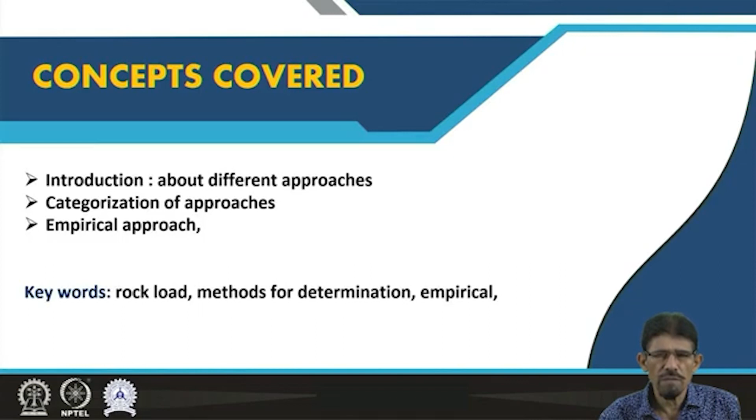In previous lectures we have elaborated about formation of damage zone during the excavation of an opening in ground, and factors relevant in estimation of rock load or ground pressure. In this lecture we will discuss approaches for estimation of rock load and ground pressure, focusing on the empirical approach in detail, along with other methods in brief. We will cover different approaches utilized for estimation of rock load, categorization of approaches, and one of the approaches - the empirical approach.

As we have already discussed, during the excavation of an opening there is redistribution of stresses, and this redistribution tries to regain the original position. During this process, the strata try to adjust with the redistribution of stresses. If the redistribution exceeds the capability and strength of rock strata, there is development of a damage zone around the excavated opening. The weight of this potentially unstable, detached, or deformed zone formed due to creation of the underground opening is recognized as rock load. In definition, rock load may result from the dead weight of some potentially unstable layer or blocks of rock, detached zone, or deformed zone, as well as from the so-called ground pressure.

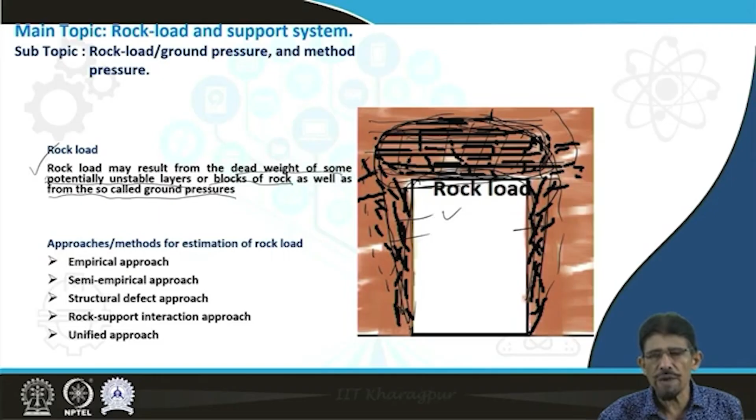The rock load can be estimated involving a number of parameters which we have already discussed in detail. Regarding approaches for estimation of rock load, we have the empirical approach, semi-empirical approach, structural defect approach, rock support interaction approach, and unified or integrated approach combining all of these. In this lecture we will elaborate on the empirical approach.

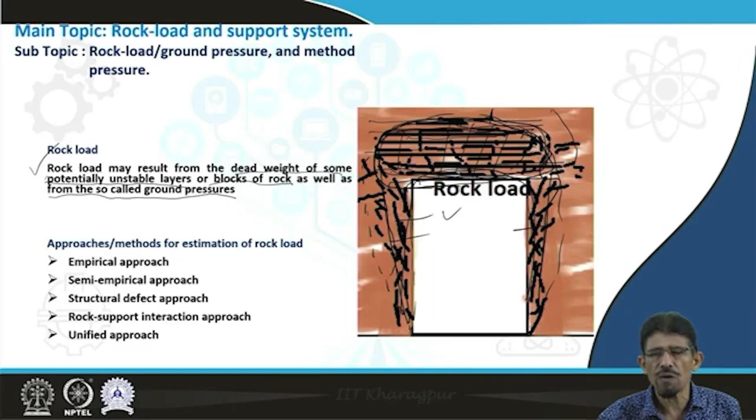As we discussed regarding determination of strength in rocks, we have experimental facilities capable of showing results concerned to strength and mechanical response of rock in case of general intact rock material. However, in case of rock strata - which is an integration making up the rock mass, consisting of rocks and discontinuities or joints - it is very difficult to test in experimental mode. Therefore, we prefer to consider the empirical approach to determine rock load.

Rock classification was proposed since very early times, and many classifications have been proposed, differing in different countries. Several researchers have proposed rock classifications, but classification of rock in geology is qualitative in nature, only providing descriptions of rock. Nevertheless, the classification proposed by Terzaghi in 1946 is the most fundamental one among all proposed rock classifications, because this is the first approach to partially quantify rock for engineering application.

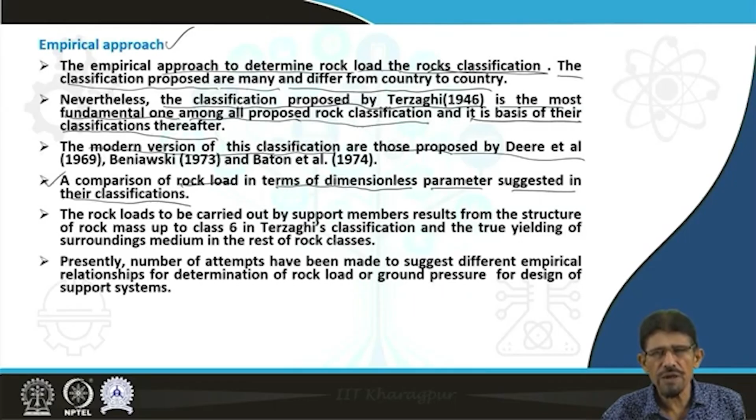It is the basis for classifications by later researchers, and modern versions of this classification include those proposed by Deere et al. in 1970, 1969, Bieniawski in 1973, Barton et al. in 1974, Hoek and Brown in 1992, and many others. A comparison of rock load in terms of dimensionless parameters is suggested in the classifications of Terzaghi, as well as those proposed by Barton et al., Deere et al., Bieniawski, etc. The rock load to be carried by the support member, resulting from the structure of rock mass, applies up to class 6 in Terzaghi's classification, with true yielding of the surrounding medium occurring in the rest of the rock classes.

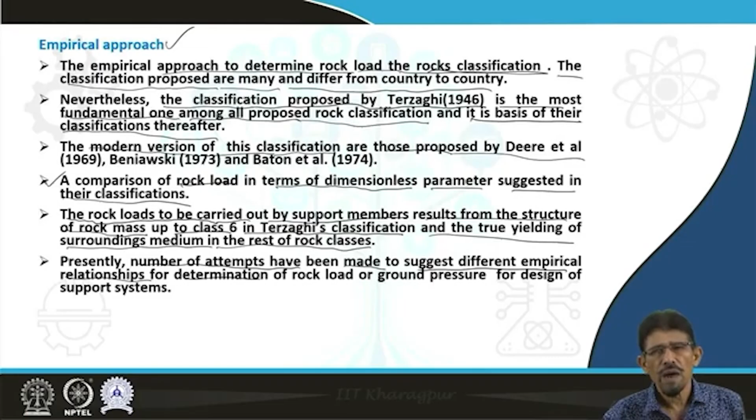Presently, a number of attempts have been made to suggest different empirical relationships for determination of rock load or ground pressure for design of support systems. Basically, the empirical approach is based on rock classification. Nowadays we are replacing the term rock classification with rock mass classification. We have a number of rock mass classifications for our geotechnical issues and applications. One of the first attempts in this direction was made by Terzaghi in 1946, although he started working on it in 1943.

Terzaghi considered structural joints of rock masses and classified rock into 9 categories: hard and intact rock, hard stratified schistose rock, massive moderately jointed rock, moderately blocky and seamy, very blocky and seamy, completely crushed but chemically intact, squeezing rock at moderate depth, squeezing rock at great depth, and swelling rock.

This classification was actually qualitative in nature but utilized for engineering approach. This concept was applied for a 5.5 meter wide steel-supported railroad tunnel excavated in the Alps during the late 1920s for providing railroad access. It was probably the first attempt of its kind.

Earlier, geologists had attempted to categorize rocks in a very descriptive manner that could not satisfy engineering use except for description of rocks. As per Terzaghi classification, if there is no joint, then the rock is recognized as hard and intact.

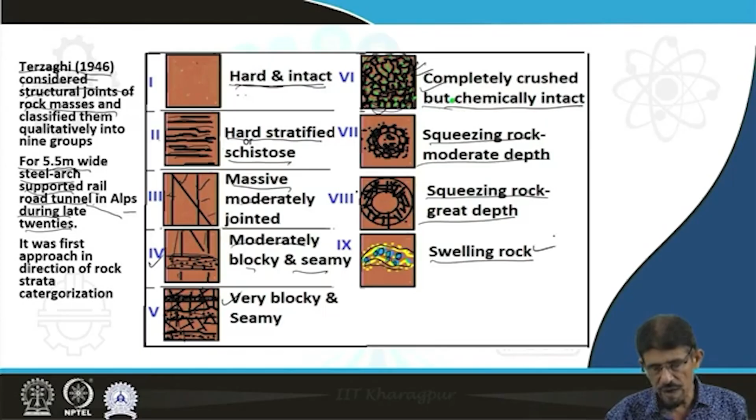As far as squeezing is concerned, squeezing is a very typical type of phenomena. Let me explain. When we create any opening in rock strata, if this opening is located in squeezing ground condition, then as per rule, due to creation of this opening, there is a redistribution of in-situ stresses, resulting in formation of a damage zone around the opening.

This formation of damage zone around an opening is generally defined by some stand-up time - few hours, few weeks, few months, few seconds or zero seconds - depending on the nature of the ground. If the stand-up time is suitable, say 5 hours, and we are not getting extension in formation of damage zone, then we are able to provide lining and support for this type of opening.

But in case of squeezing, there is a continuous increment in formation of damage zone with respect to time. The formation of damage zone becomes dynamic in place of static. Therefore, it is very difficult to estimate rock load or ground pressure to provide a support system of defined capacity.

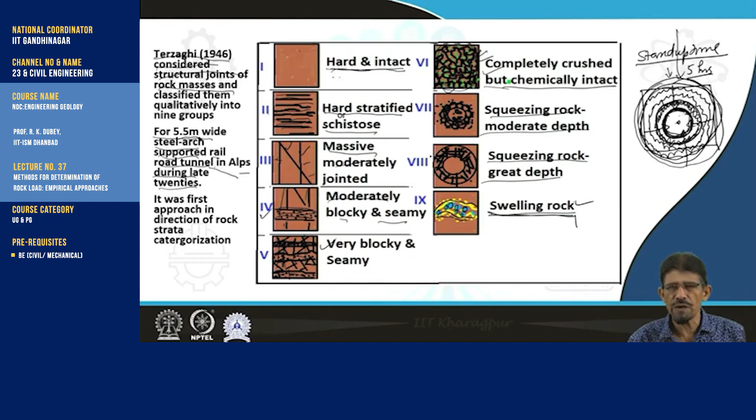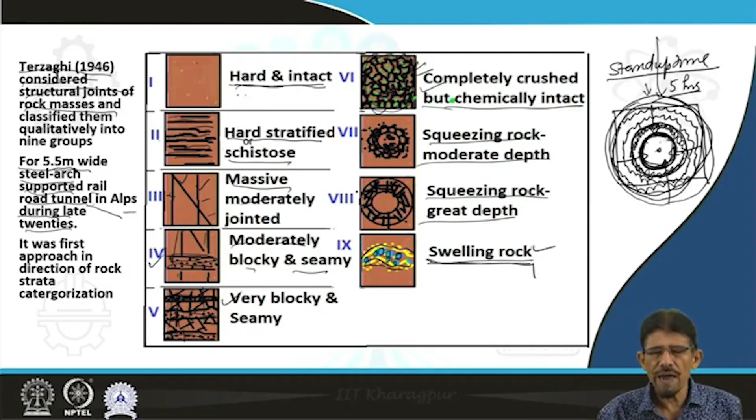Later, after classification, Terzaghi gave some load value in terms of rock load factor. The similar categorization was later utilized for calculation of rock load. Terzaghi integrated the results of trapdoor experiments and the estimated rock load from the alpine tunnel to compute rock load factor Hp in terms of opening width and tunnel height Ht of the loosened rock mass.

At that time there was no concept of rock mass - earlier people recognized the rock mass simply as rock above the tunnel crown which loads the steel arches, because the concept of Terzaghi was fully based on trapdoor experimental results and experience from the 5.5 meter diameter tunnel located in the Alps with steel arch support.

He has elaborated about rock load factor for all his 9 classes of rocks in tabular form. In general, here I try to explain.

As per the concept of Terzaghi, when the strata is disturbed by excavation of an underground opening, due to creation of this opening there is a redistribution and induced formation of a damage zone around the opening. The dimension of the damage zone is more toward the crown side of the tunnel, this is the crown of the tunnel, and sideways slightly less.

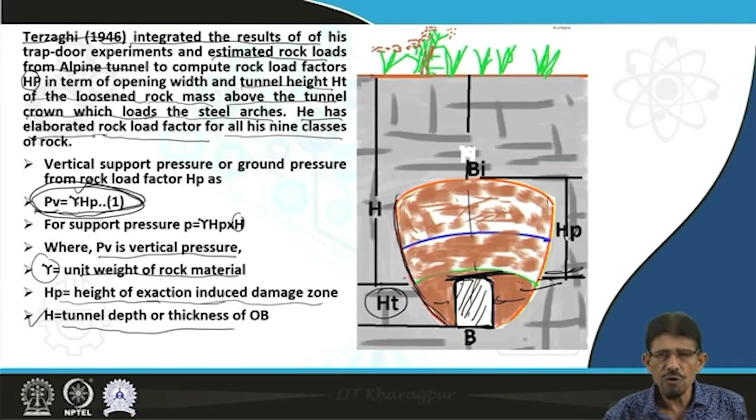So in tabular classification, to support 9 categorized rock classes, Terzaghi has presented the rock load factor in terms of HP, in terms of tunnel opening height and the width of opening, for excavation using drill and blast.

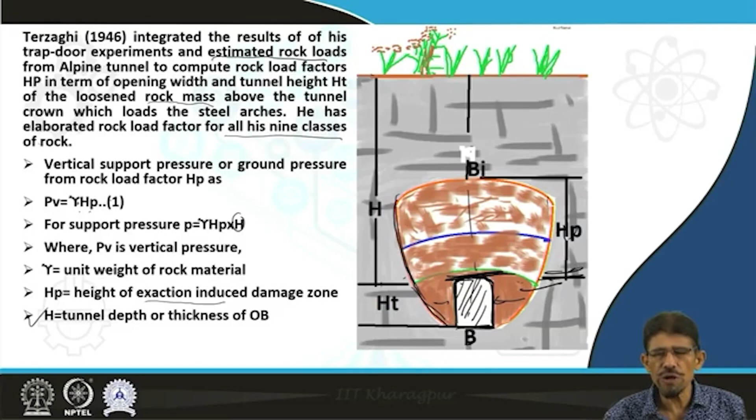You can see Terzaghi's rock load classification, he has presented or categorized 9 classes. For hard and intact rock, as we have already discussed, HP is 0, meaning there is no formation of damage zone. It may be in feet originally, but maybe meters, maybe any unit. So hard and intact rock is not going to show or form any damage, therefore HP is 0, where light lining is required only if spalling or popping occurs, otherwise there is no requirement of any support.

The next class is hard stratified rock or schistose rock, and the rock load factor ranges from 0 to 0.5 times the span of opening, B. In this case, light support is mainly for protection against spalling, otherwise there is no requirement. But in this hard stratified schistose rock, due to the mode of failure of such rocks, in general the load may change erratically from point to point due to the presence of stratification and schistosity present in rocks, as per practical experience.

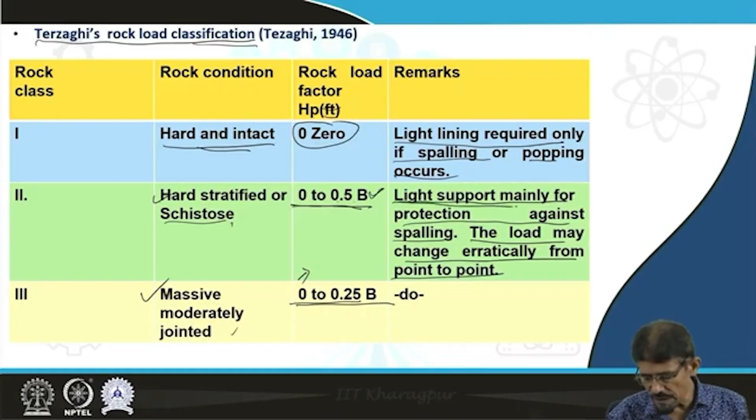Then the third class is massive moderately jointed, where the rock load can be estimated simply, ranging from 0 to 0.25 multiplied by B. And the remarks for the support system concern light support, same as above.

Next is the fourth class, that is moderately blocky and seamy. The moderately blocky and seamy can be recognized for calculation of the rock load in terms of HP, ranging from 0.25 B to 0.35 B plus HT.

No side pressure observed. In case of the fifth class, very blocky and seamy, the rock load ranges from 0.35 to 1.10 B plus HT. Little or no side pressure observed.

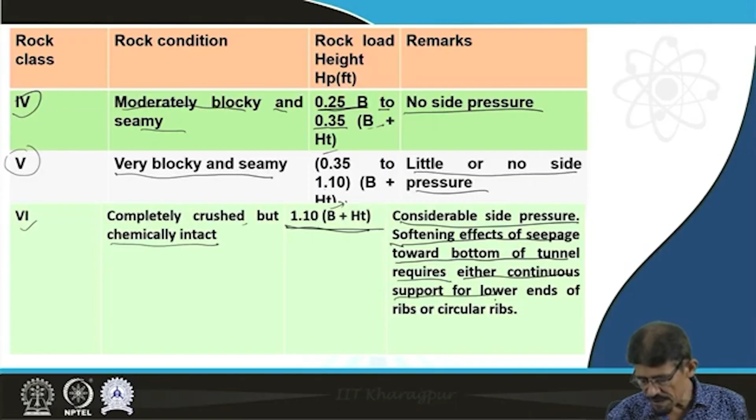Sixth class, completely crushed but chemically intact, where the rock load factor we can calculate as 1.10 B plus HT, where B is the width of the opening and HT is the height of opening. Considerable side pressure observed. Softening effect of seepage toward the bottom of the tunnel requires either continuous supports for the lower ends of ribs or circular ribs sufficient to stabilize such conditions.

Seventh class is squeezing rock. This is a very typical type of rock, creating a lot of problems, increasing load and so on, but Terzaghi anyhow presented this relationship: 1.10 to 2.10 B plus HT. You see the magnitude of the rock load, and in the remarks you can see heavy side pressure, invert struts required, circular ribs are recommended.

Here the support system in squeezing ground conditions is very difficult due to continuous increment in rock load, creating a lot of uncertainties. In the case of one tunnel located at the Main Boundary Thrust in the Himalayan area, we waited for 6 months, and ultimately we were forced to divide the diameter into 3 divisions, and then successfully constructed the tunnel in the MBT in Uttarakhand.

Squeezing rock at great depth, you can see 2.10 to 4.5 B plus HT, and the same type of precautions required in such cases. And for case 9, swelling rock, here up to 80 meters, irrespective of the value of B plus HT, circular ribs are required. In extreme cases, use of yielding support is recommended.

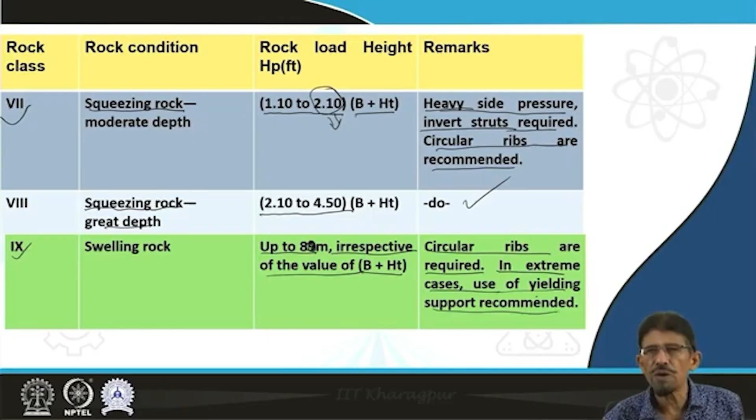Later on, the classification of Terzaghi was modified by Deere et al. in 1970. Deere et al. added the RQD parameter, rock quality designation. The rock quality designation is simply the summation of sound core more than 10 cm divided by drill length, multiplied by 100 — a very simple parameter utilized for categorization of rock mass or rock strata. So Deere et al...

Deere has modified the Terzaghi concept, adding some additional classes and applying RQD as a column. You can see hard and intact rock ranging in RQD from 95 to 100, with 0 rock load factor, same remarks as observed in case of Terzaghi.

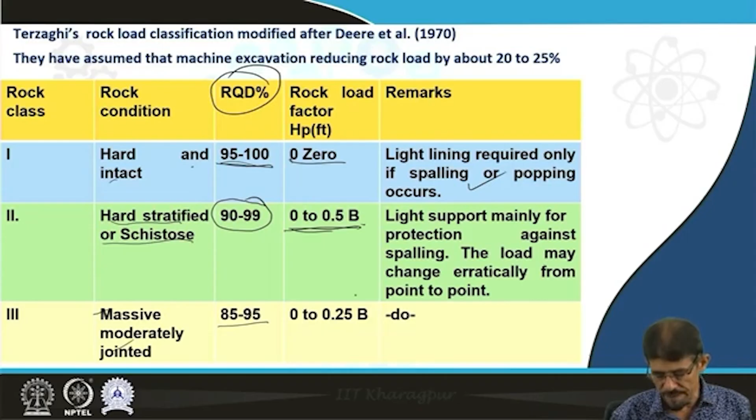Hard and stratified or schistose rock is measured in terms of RQD from 90 to 99, with load factor 0 to 0.5B. All terms we have already explained. Massive moderately jointed rock is 85 to 95 RQD, 0 to 0.25B, as observed in case of Terzaghi. The precautions or remarks are the same as observed in case of Terzaghi classification.

Then the fourth class, moderately blocky and seamy, defined by RQD ranging between 75 and 85, where the load factor is 0.25B to 0.35B plus HT is required, as we have already observed in case of Terzaghi classification.

Types 4, 5, and 6 are reduced by approximately 50% from the Terzaghi 1946 classification values because the water table has little effect on the rock load. Next, the fifth class, very blocky and seamy, is characterized by RQD value of 30 to 75.

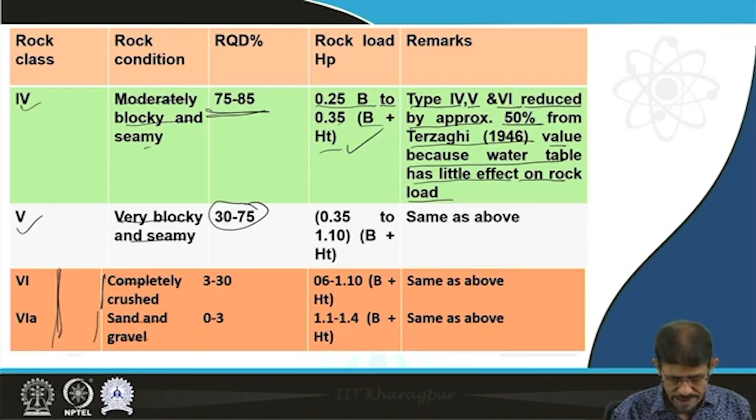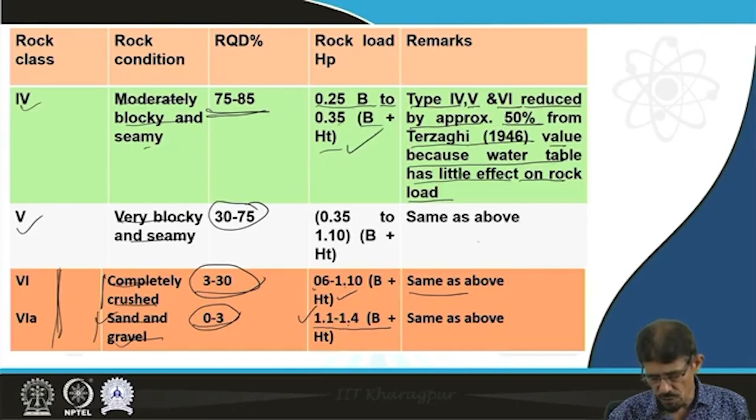Then completely crushed. In Terzaghi classification, this was completely crushed but chemically intact. But in the modification by Deere et al. in 1970, they suggested completely crushed only, omitting the chemically intact term. Also, they added class 6A, sand and gravel, as an additional class. So completely crushed rock is defined by RQD ranging between 3 and 30, with rock load factor ranging 0.6 to 1.10B plus HT, with the same concept as given above. Next, sand and gravel is defined by RQD 0 to 3%, and in this condition the load can be calculated as 1.1 to 1.4B plus HT, with remarks same as above.

For class 7, squeezing rock at moderate depth, the same concept applies as observed earlier. Here, for squeezing rock at moderate depth, squeezing rock at great depth, and swelling rock, it is not possible to determine RQD value. Therefore, these rocks are very difficult to estimate or insert a support system for.

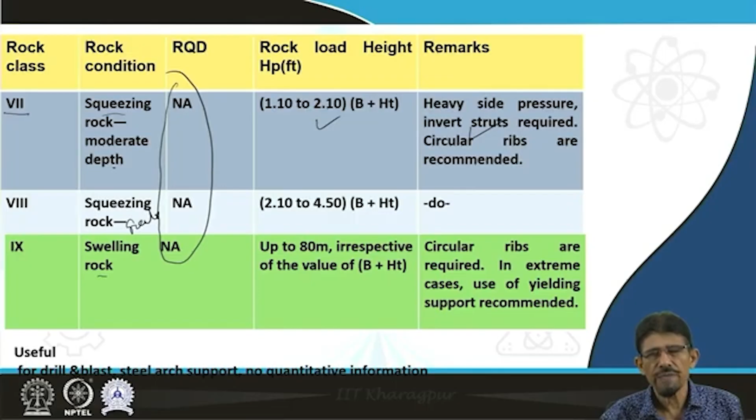There are some limitations as described by Singh and Goel in 1999, in the form of observations on Terzaghi classification based on measured values. This classification is useful for small tunnels where the diameter is limited up to 6 meters only; Terzaghi's method provides reasonable support pressure in such cases. For large tunnels and caverns ranging between 6 and 14 meters, it provides an overestimate, which is problematic. For squeezing and swelling ground conditions, estimated rock supports fall into a wide range and are not practical for use.

We have a number of approaches for estimation of ground pressure. Unal has suggested one very simple concept, PV. Besides Terzaghi, a number of researchers have also attempted this problem and suggested support pressure in terms of rock mass rating system, height of the tunnel, etc.

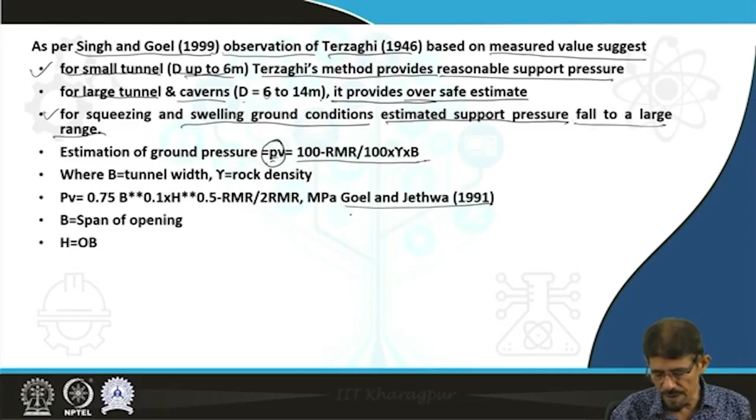As per the concept given by Unal, the estimated ground pressure PV can be measured as (100 minus RMR) divided by 100, into unit weight of rock, into the span of the opening. Another approach by Goel and Jethwa, which we will discuss again in our next class, is 0.75 B power 0.1, H power half, minus RMR divided by 2RMR, in MPa, where B is span and H is overburden. We will discuss this in the next class for continuity.

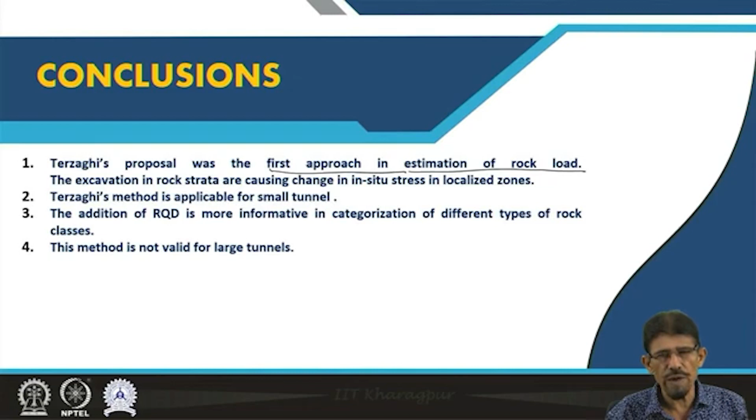Friends, we have discussed elaborately the concept proposed by Terzaghi. The Terzaghi concept or proposal was the first approach in estimation of rock load. Earlier, all classification was purely qualitative and utilized for description purposes only. Excavation in rock strata causes change in in-situ stresses in a localized zone, therefore forming a damage zone, and that damage zone represents the rock load. Terzaghi's method is applicable for small tunnels, not suitable for large tunnels, as commented on by a number of researchers including Singh, Goel, Barton and others.

In addition to this, RQD is more informative in categorization of different rock classes as additional support, supplemented by Deere et al. in 1970, though this method is not valid for large tunnels and shows a lot of scatter in data.

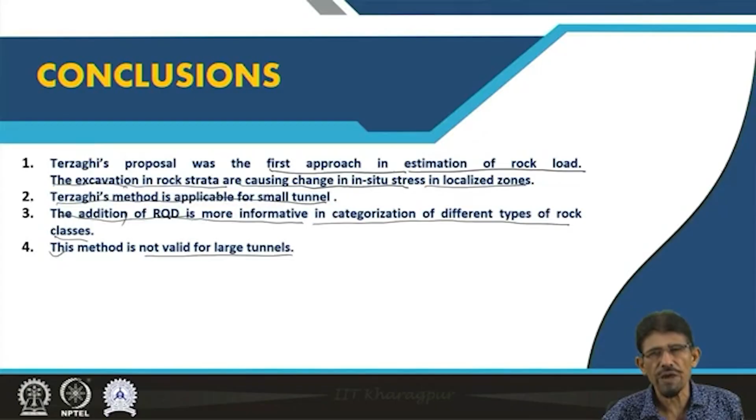Dear friends, in this class we have elaborately discussed the concept of rock load and ground pressure, and different types of approaches in brief, then in detail the empirical approach proposed by Terzaghi and advocated by Deere et al. in 1970. Some approaches apart from Terzaghi and Deere are also important for estimation of rock load, which we will discuss in our next class. Thank you very much.